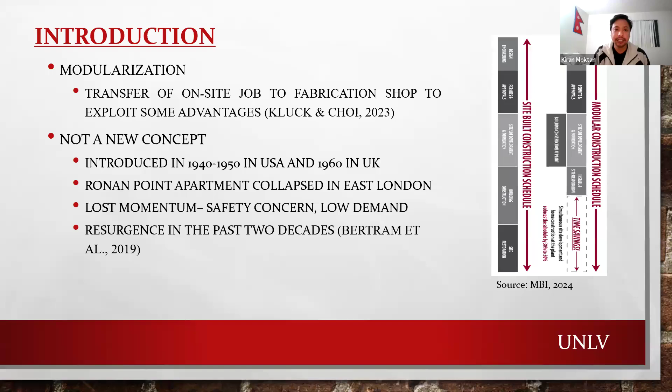Looking at the current status of the construction industry, construction spends around 13% of the GDP, but labor productivity growth over the past two decades is only 1%. Also, due to declining interest among youths and the retiring or changing professions of skilled older laborers, there has been a shortage of labor, which has led to rising labor costs. Similarly, housing demand is also rising globally, and this is the position where modular construction comes as the potential solution to address these critical issues.

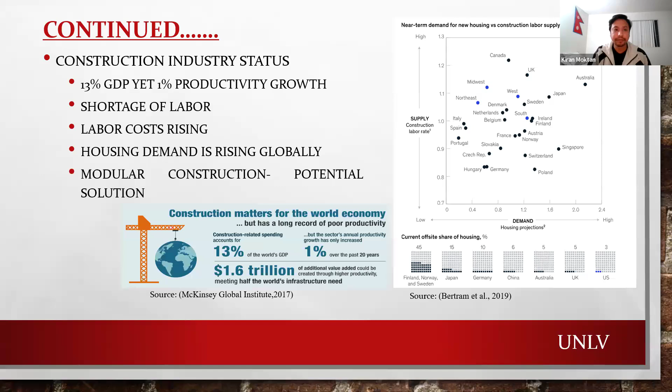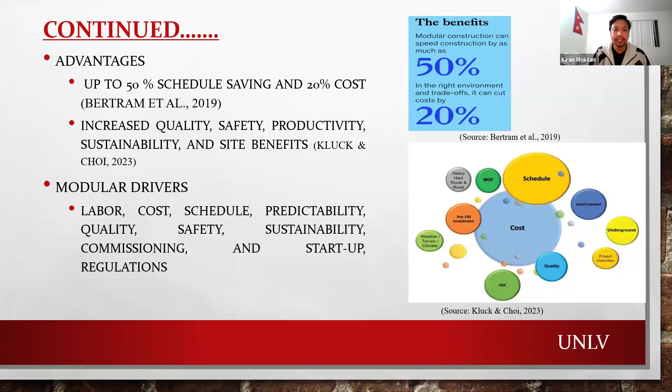Talking about the advantages of modular construction, it can save up to 50% of the time and up to 20% of the cost. There are other advantages like increasing quality, safety, labor productivity, sustainability, and other site benefits. Some of the modular drivers are labor cost, schedule predictability, quality, safety, sustainability, commissioning and startup, and regulations, and so on.

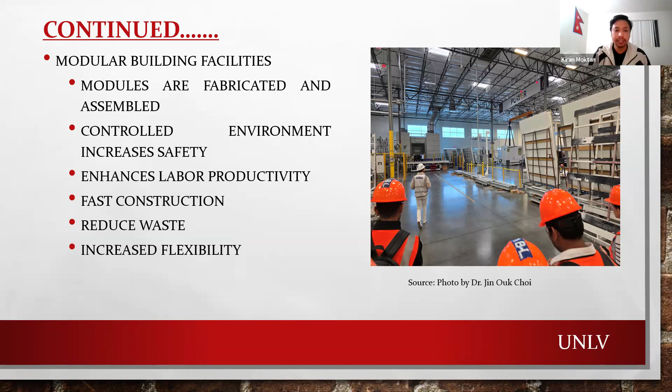This study is about modular building facilities. So now we need to know about modular building facilities. Basically, it is a manufacturing plant where modules are fabricated and assembled in a controlled environment. Due to the controlled environment, it increases the safety of workers and also enhances labor productivity, increases the construction of modules, reduces waste, and increases flexibility.

The major objective of this study is to identify the trend of modular building facilities in terms of the size of the facility, production capacity, geographical location, types of market served, and module material preference. This study further analyzes to identify any significant pattern in the development of these facilities.

The methodology used in this study is the literature review of related research papers, industry reports, case studies, and other related documents. For the collection of data, this study uses the MBI member directory list, in which the manufacturers are listed. It uses around 64 manufacturers' data for the analysis, which are based in the US.

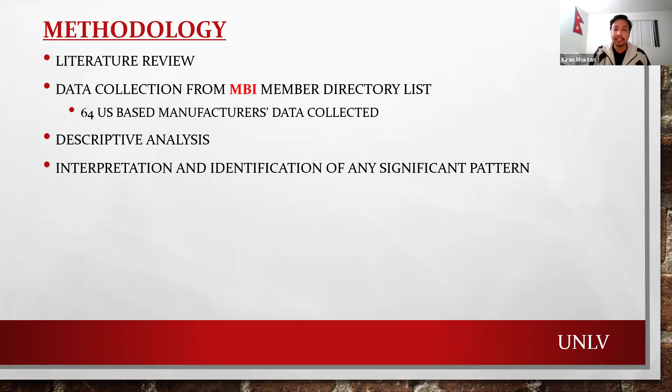Further, it uses descriptive analysis and presents the results in figures and charts. Further, the interpretation and identification of any significant pattern is presented.

Modular Building Institute - since the data is extracted from the MBI list, we should know about the MBI too. It is a non-profit trade association representing diverse membership, including manufacturers, dealers, architects, developers, and general contractors. Approximately 255 modular manufacturing companies are in North America, around half of which are listed in MBI.

The key attributes analyzed in this study are the size of the facility, which reflects production capability, and geographical location, which gives insights about regional distribution, highlighting potential for clusters, underserved areas, and geographical advantages like proximity to urban centers or transportation hubs. This information assists in understanding how location impacts logistics, market access, and material supply chains.

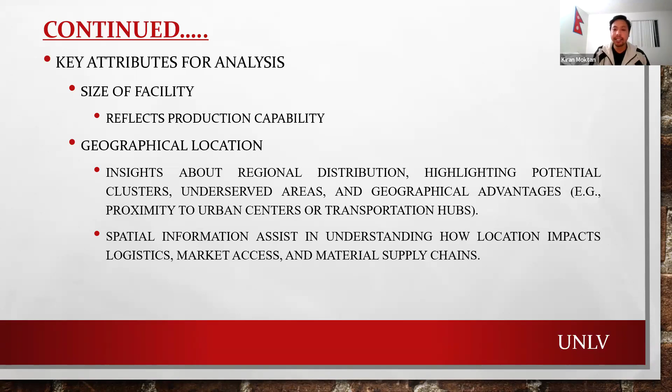Further, it also analyzes market served, which indicates the primary sector of the market focused on by these manufacturing facilities. And finally, it analyzes module material type, which is basically the primary structural material used for the fabrication of the modules.

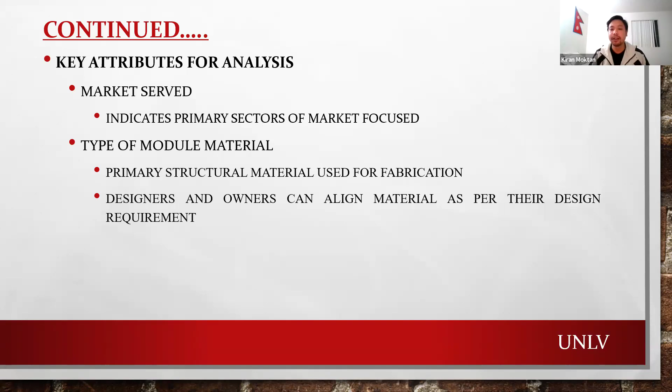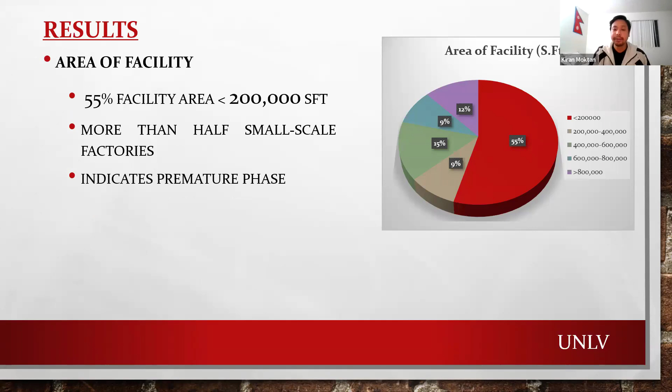Similarly, looking at the area of the facilities available, it shows that more than half of the manufacturing facilities are small scale, with area less than 200,000 square feet. This indicates the premature stage of modular construction in the United States.

Finally, the module material analysis shows that steel is preferred over wood and other materials. There's an interesting finding that around one third of the module manufacturing facilities use shipping containers as a module material because of their high strength, durability, customizability, fire resistance, and low cost.

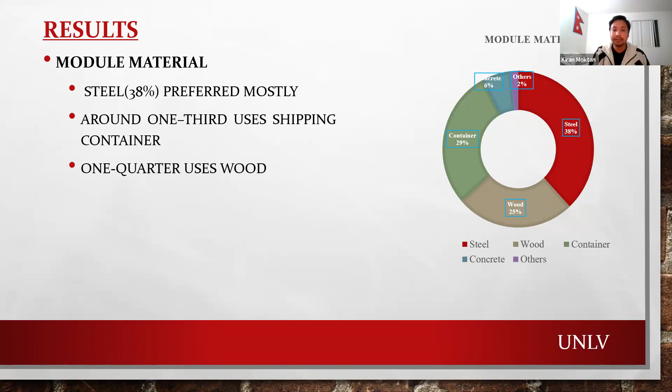We can see that only one quarter use wood as a module material.

Looking at the geographical distribution of these module factories, we can see that around 50% of the states are underserved or do not have any module facilities, and most facilities are clustered in states like California and Texas, around 10 facilities each, whereas other states hardly have one or two manufacturing facilities.

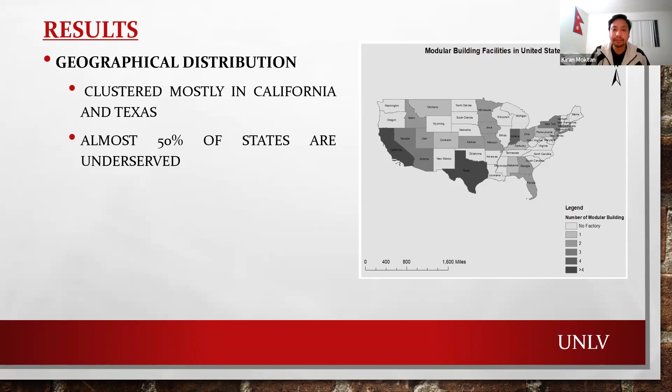So, the discussion and conclusion of the study. Looking at the analysis report, we can see that the most served market is the residential market, which aligns with the growing housing demand, and can be seen as a potential strategy to meet that demand.

Also, more than half of the facilities are small scale, which indicates that the development of modular construction in the United States is in a premature stage, and can be challenging for large and complex projects and high-rise buildings.

Similarly, we can see widespread use of steel and containers, which reflects a shift towards materials that offer more structural strength, durability, design flexibility, and fire resistance. People are slowly shifting from wood to steel material.

Looking at the distribution, there is a disproportionate distribution of manufacturing facilities, which may have occurred due to regulatory environments, high demands, logistics accessibility, or market enthusiasm.

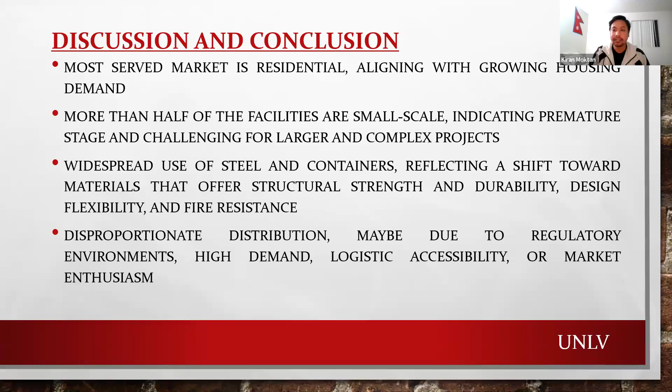Although this study shows foundational findings, it also has some limitations. The factories analyzed in this study are US-based and members of the MBI.

The data were collected through publicly available websites, most of which lack completeness or standardized data. Around only 53% of the data on facility area was analyzed due to lower availability, and only around 20% of data related to production capacity was found on these websites.

So unfortunately, we could not do the analysis of the production capacity of the modular facilities.

Also, in some cases, material types were not mentioned on the website, and we had to go through videos, images, and other blogs to identify the module material using visual inspection, which may have created the possibility of misclassification.

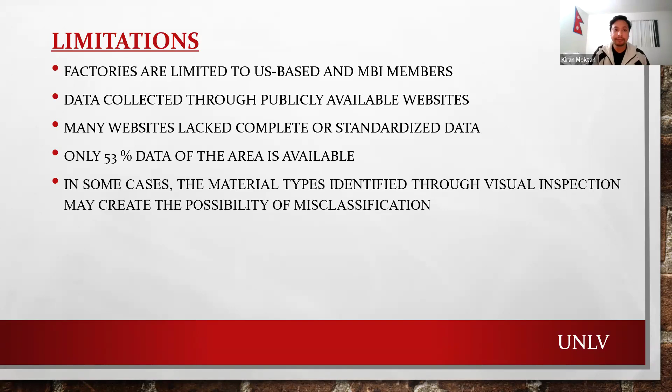This study contributes to the body of knowledge by providing an overview of the trend of modular facilities located in the United States, and it is industry relevant, bridging the gap between industry and education.

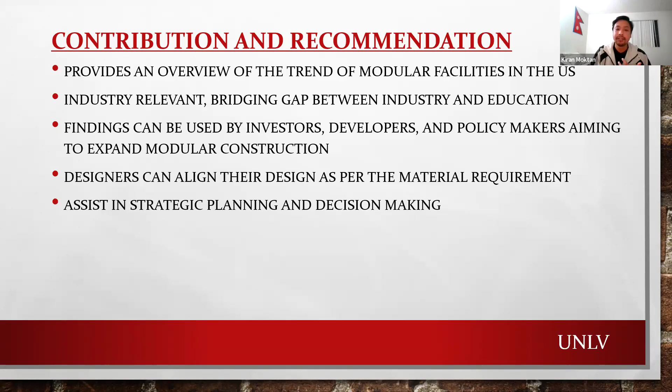Findings of this study can be used by investors, developers, and policymakers aiming to expand modular construction. Designers can also align their design as per the requirements of material and market. This finding can help assist in strategic planning and decision making.

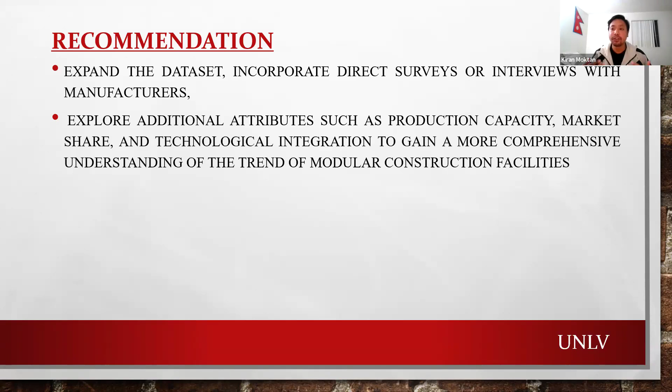For future study, this study recommends expanding the data set and incorporating direct surveys or interviews with manufacturers for more validity of the data, and also exploring additional attributes such as production capacity, market share, and technological integration to gain a more comprehensive understanding of the trend of modular construction facilities.